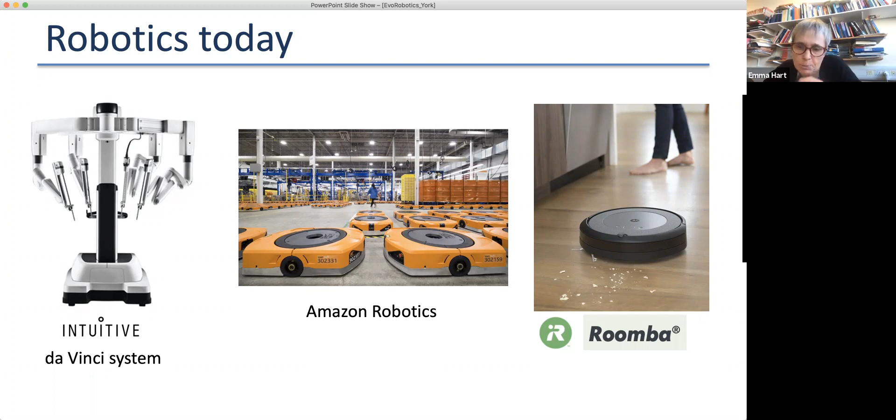But what if we want to evolve, what if we want to create robots that work in environments we know nothing about? What if we want to send a robot to a faraway planet to do some exploration, or even closer to home, put it inside a nuclear reactor to clean up a place a human can't go? We're not entirely sure what task the robot might need to do when it gets there, or what the environment is like physically. So how can we, as humans, design a robot that's going to be right for these completely unknown environments?

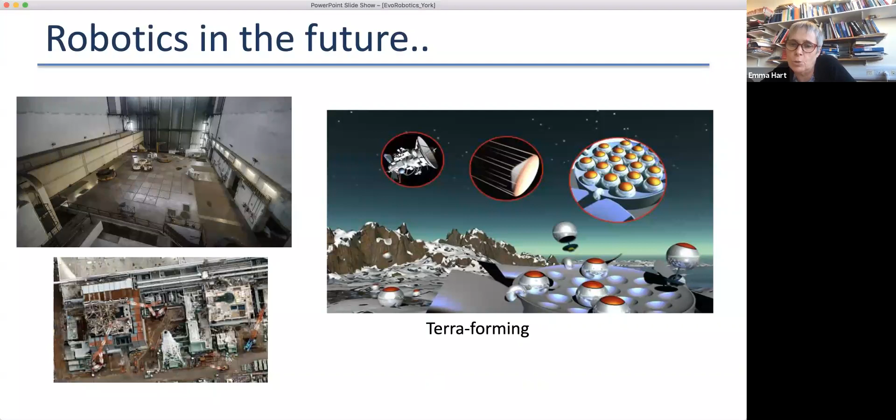This is really what I want to talk about: the autonomous design of a robot in cases where we can't use our human knowledge to do it the way we normally would here on Earth. So what I'm going to talk about is using evolution to do it. Why evolution? I know this might be familiar to some people in the audience.

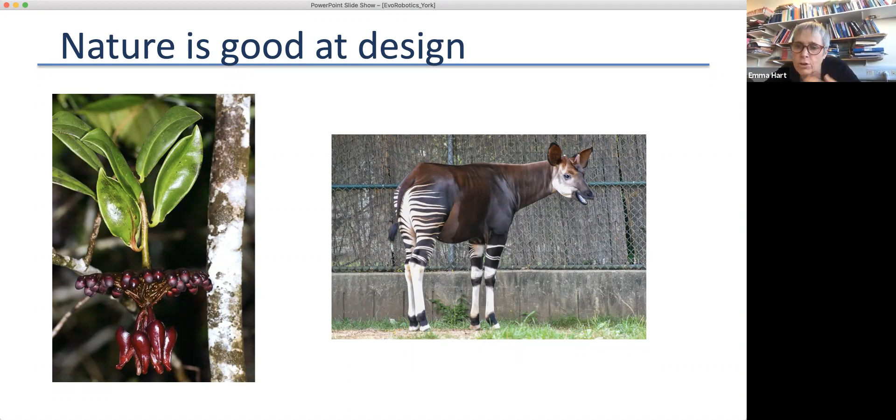So the question is then, can we somehow encapsulate this inside a machine to use an artificial evolutionary mechanism to design robots that are very good for some environment that we know nothing about?

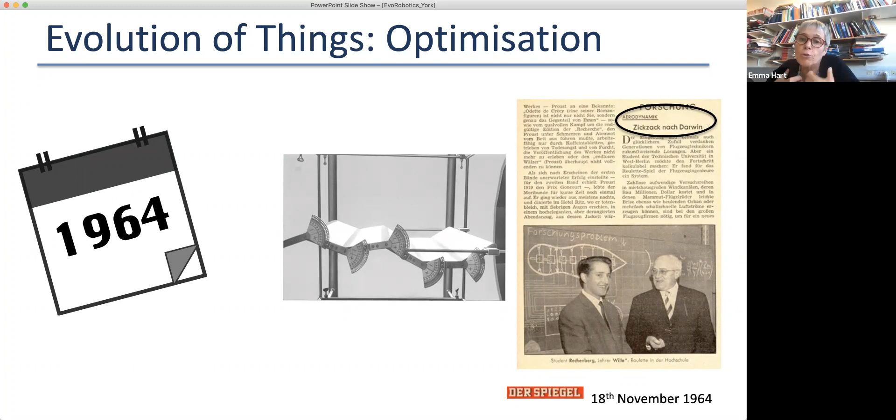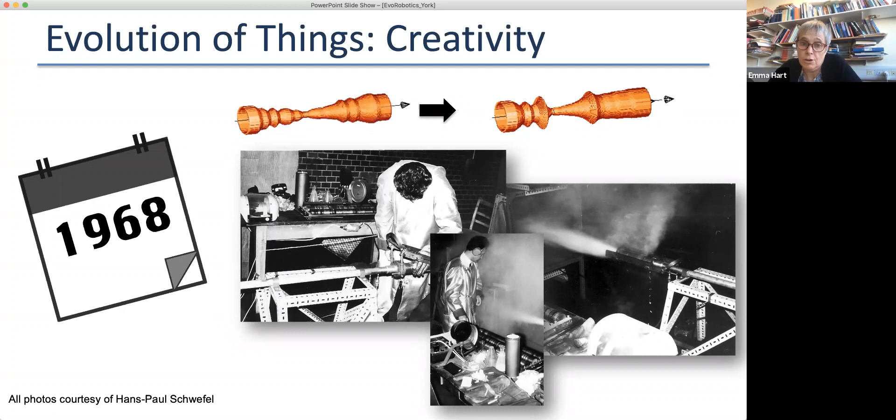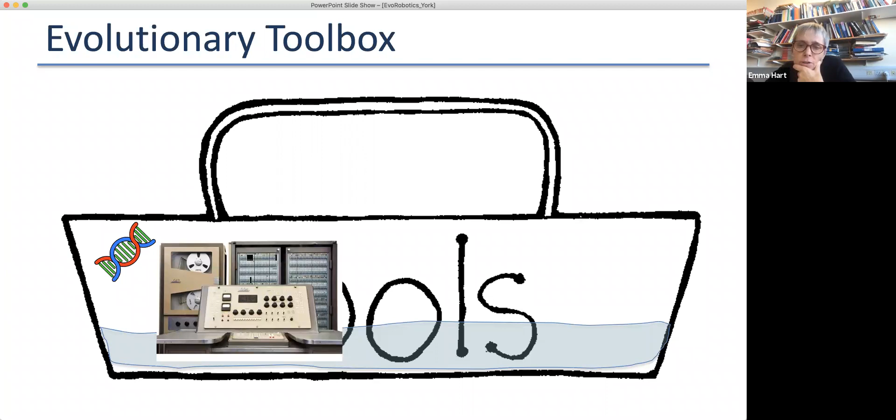Of course, we've got much more tools at our disposal now, which makes evolution a lot easier for us. Right at the beginning, this toolbox that allows us to create artificial evolutionary mechanisms was pretty empty. We had some pretty basic computers. Right at the beginning of artificial evolutionary algorithms, there was some theory that basically suggested that if you represented things as bit strings, it gave you some indication of the likelihood of evolving a good solution. Now, these are pretty basic tools if you want to start using evolution to design robots.

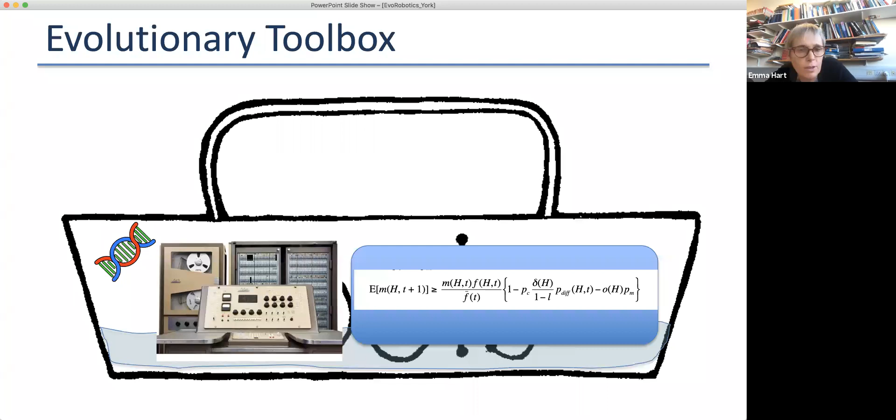Fortunately, here we are in 2021 in a much better place, where our knowledge of artificial evolution and the tools that help us do that have really vastly increased. We have much more powerful computers with powerful CPU and GPU. We have excellent simulators that take advantage of this improvement in hardware to give us very realistic simulations, close to real time, of a lot of things. We also have big advances in evolutionary theory, particularly encodings that don't rely on bit strings but allow us to use mechanisms, which I'll explain later, that let us generate designs. This turns out to be really useful for robotics in particular.

Artificial evolution also has some new things at its disposal, like a bunch of different materials. So if we want to use it to evolve robots, we don't just have to make them out of plastic - we can make them out of flexible soft materials that you can pass current through, that can flex and change their stiffness. You can even make them out of wood or paper. So the set of materials available to build robots has changed.

We also have huge advances in engineering that enable us to prototype robots very fast in the real world using 3D printing. Again, 3D printing is not just restricted to printing plastics, it can produce all kinds of things these days. And of course, advances in automation allow us to actually assemble robots from 3D printed parts and any additional things we need. So given all these tools at our disposal, it's now becoming much more clear that it seems like a realistic thing that we can try to harness all these things together and use it to evolve robots in these situations that we don't know anything about.

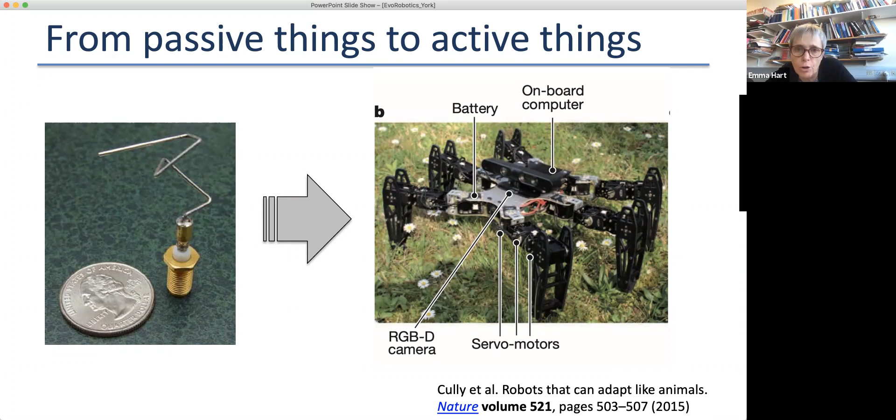So what we really have to think about now is how are we going to co-evolve or jointly evolve both the morphology, the shape of the robot, and what defines its shape in terms of how it's actuated, whether it has legs or wheels or a mixture of the two, but also its brain and how its brain interacts with what the robot is sensing about the world, and how that information is turned into signals sent to the moving parts of the robot. This becomes much more tricky.

There's a very nice book that discusses this by Pfeifer and Bongard from 2006, called How the Body Shapes the Way We Think. What they discuss is that we often just think about intelligence as something the brain has, but actually they argue intelligence can be distributed across both the body and the brain. If you have smart evolution, by evolving a smart body, you can remove some of the need for complexity in a very complex brain.

So there's this balance for the evolutionary process of figuring out how much effort goes into designing a good morphology and how much is required to design a good brain. If you get that balance right, it becomes easier to do both. You can have a less complex brain by having a very well-designed body. But to do that, you've got to do both things together. You can't just design a body and then apply evolution to design the best brain for it. You have to do both together to let evolution decide where the balance lies between intelligence in the body and intelligence in the brain and control mechanism.

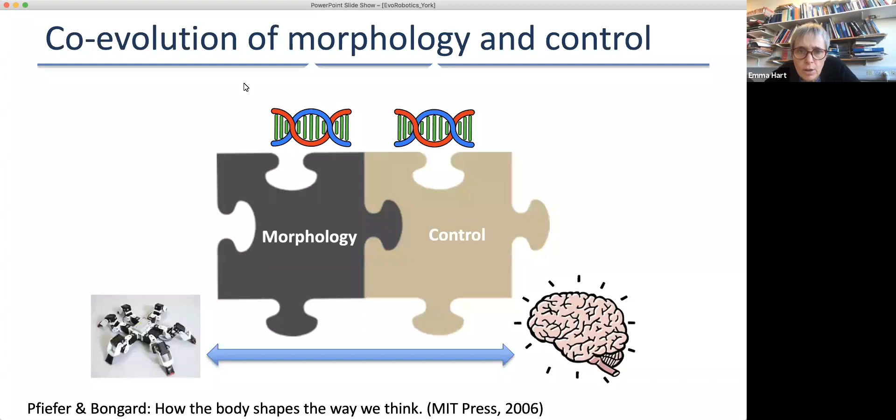So before getting onto the project, I thought I'd give you a little bit of history of where artificial evolution is at in terms of co-evolution of body and brain, because it's not a new thing. In fact, it probably goes back to about 2000, where we see one of the first examples of researchers trying to co-evolve robots in terms of body and brain.

So what you see here, if I can make these little videos work, is they evolve in simulation these very simple robots made from tubes that can join together and be actuated at a joint. They use evolution in simulation, shown in the top picture, to evolve a robot good for a particular task. After it's been evolved, they pick the best one and create it by hand. Here you can see the real physical robot, which is a pretty good replication of the simulated robot, proving it works in practice.

It does co-evolve the body and the control mechanism, but this robot doesn't have any sensors, so it's unable to know what's going on in its environment. It can only actuate and move through its environment.

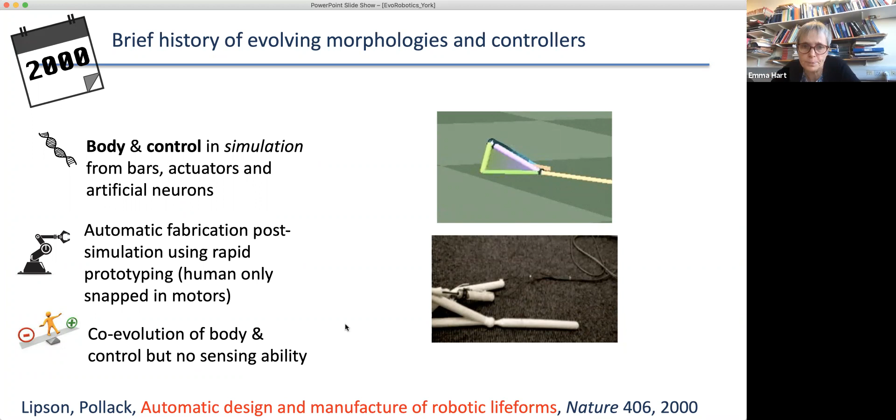So jumping forward a bit, I said earlier that artificial evolution has had a bit of a kickstart from advances in new materials. This is some researchers, again from Lipson's lab, trying to take advantage of flexible materials that you can actuate by changing their stiffness. They use an evolutionary algorithm to evolve these robots in simulation, and you can see this working here. You pass some current through, and it makes the material flex, allowing the evolutionary process to find a way for the robot to move.

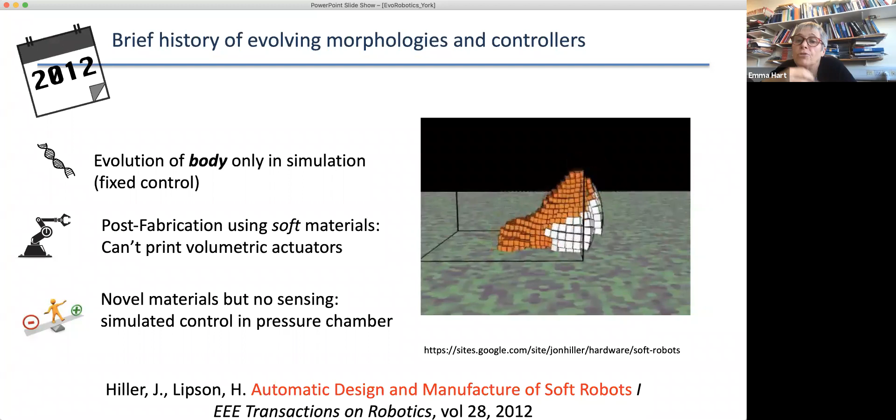Just like I showed you before, they do this in simulation, and afterwards they build the robot by hand, because at the time it was hard to actually create these actuated flexing materials. They used a proxy by putting it in a pressure chamber, and changing the pressure allows the materials to contract and expand. But again, there's no sensing here. The robot is capable of actuation, which is a step forward, but it can't sense any information from its surroundings.

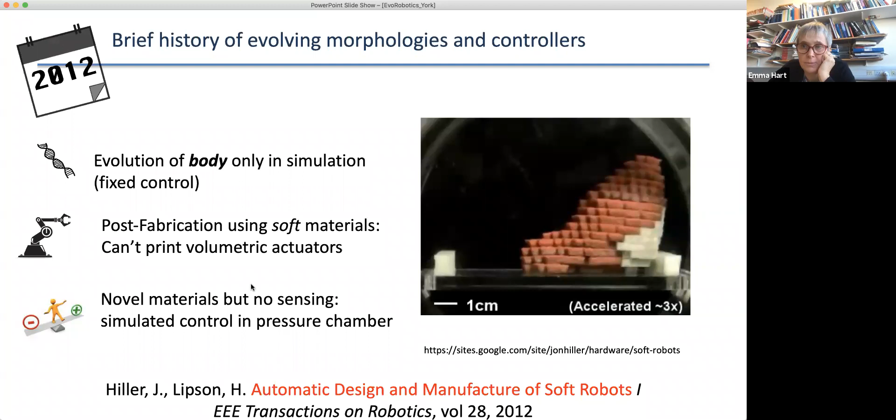One thing in common with everything I've just shown you is that in all these cases, you apply artificial evolution to evolve a robot in simulation, and then once you've found the best thing, you build the robot by hand and test it to see how it works.

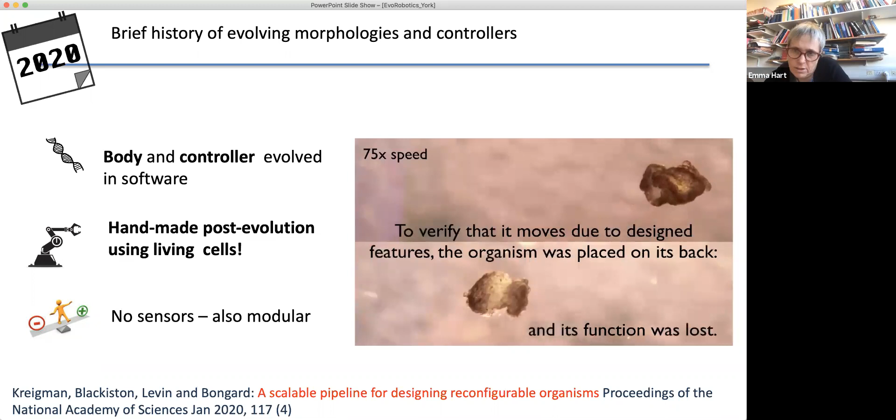This is very interesting work — obviously this is at a kind of nano scale, and they suggest it has applications in nanorobotics in future, for example in drug delivery inside the body. They do a bunch of tests to show that, quite surprisingly, these hand-built living things exhibit pretty much the same behaviors as what you see in simulation, and they do it for lots of configurations, building them afterwards.

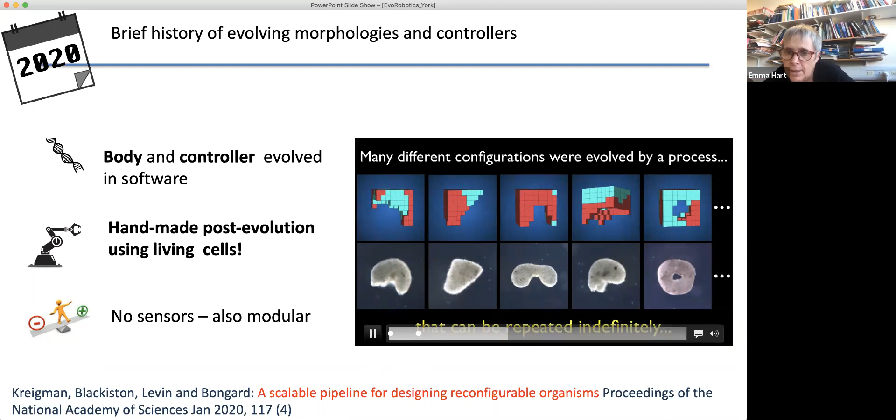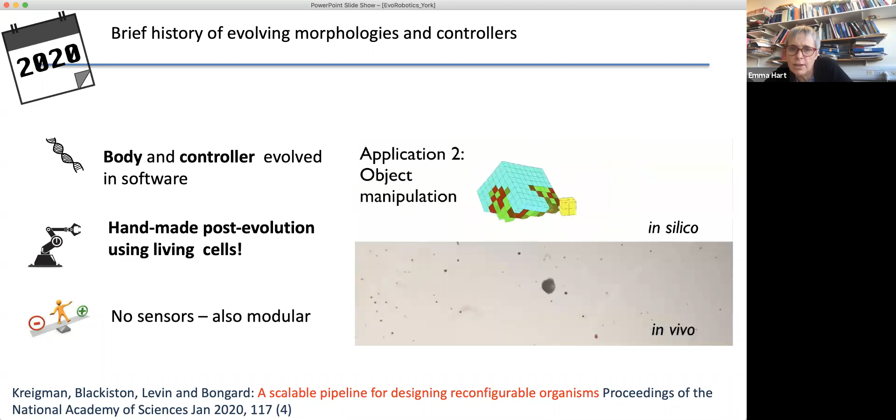So it's very interesting work. You can find it in lots of the national newspapers and on YouTube. Just to show you an example there. So here's one that's evolved to actually kind of scoop up material. You can see the simulation. Here's one for pushing, and you can see that the simulation and the in vivo ones work pretty similarly. Okay, I'm going to just stop that there.

So again, hand built following evolution, but using living cells, which is definitely interesting. But again, no sensors, and modular in the sense that all of the components used to build the robot are identical. So even though I just said that, actually surprisingly in the living cells case, the robots had pretty good performance when they were built compared to what you saw in simulation.

What we generally see, and anybody that's been working in robotics of any kind will know this, is that generally when you build a robot in simulation and then transfer it to the real environment, it very rarely behaves in exactly the same way that you expected in simulation. You can do a lot of things here, like adding noise to the simulation, doing some evaluations in the physical system. But it's a very well-known problem in robotics, and one that's really hard to get around unless we have simulators that are absolutely 100% perfect replication of the real world.

So this really leads me on to what this project is about: can we change this by saying, instead of trying to address the issue of how do we make our simulations better so that things that evolved in simulation work well in the real world, can we just do evolution directly in the real world? Because then we're going to remove this reality gap altogether.

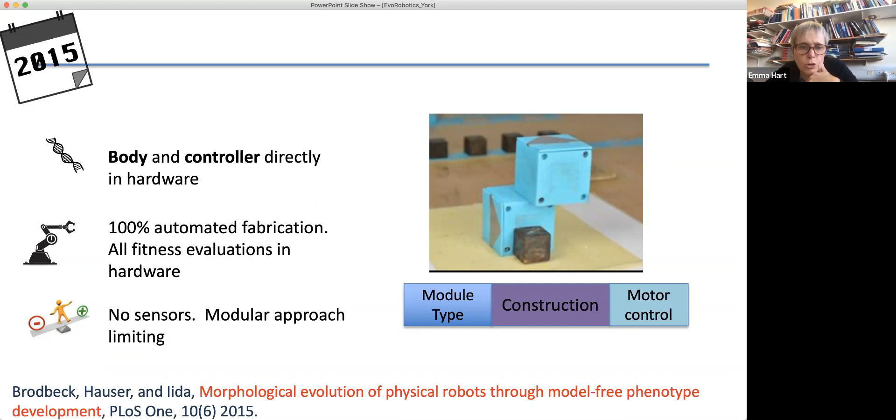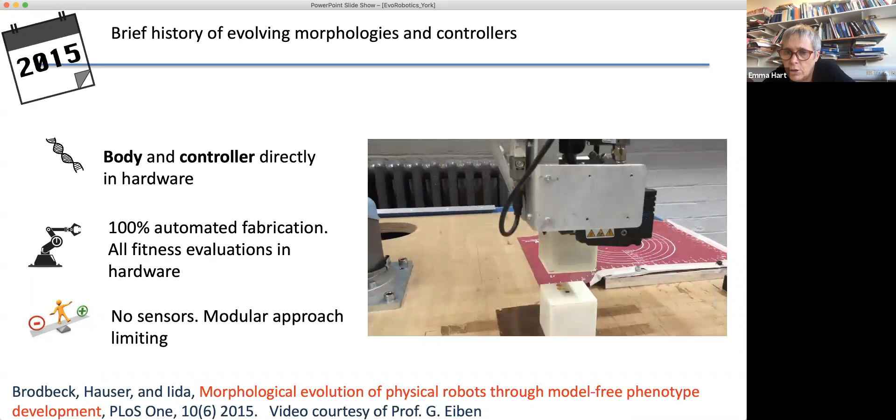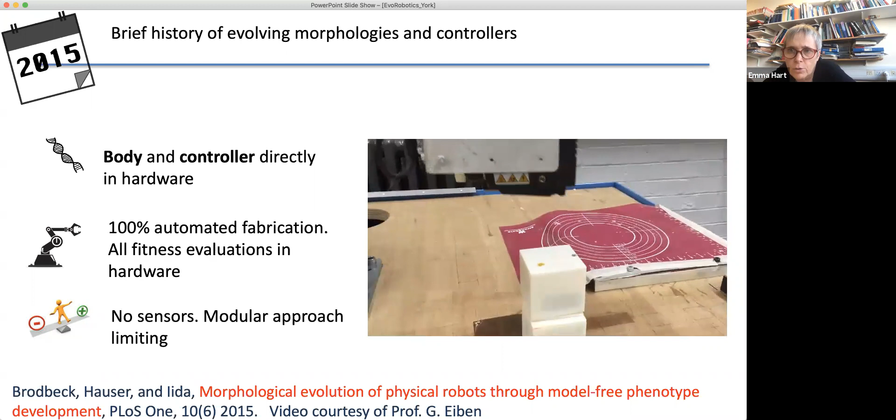So let me show you a video of this working. What you see here is basically there's a computer that's doing the evolution. It comes up with a design, and then this arm builds the robot. It's a little bit hard to see on the video, but it squirts out some glue, you'll see there. And then the blocks are glued together in the pattern defined by the genome. It picks up some of these actuated blocks and does the same kind of thing of gluing those together.

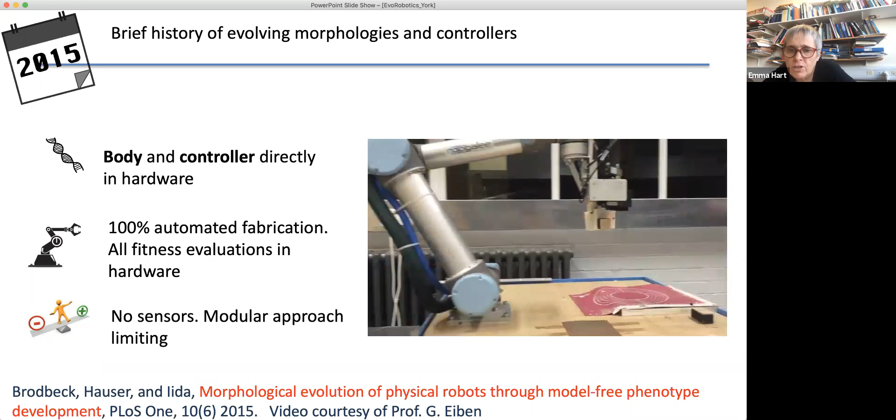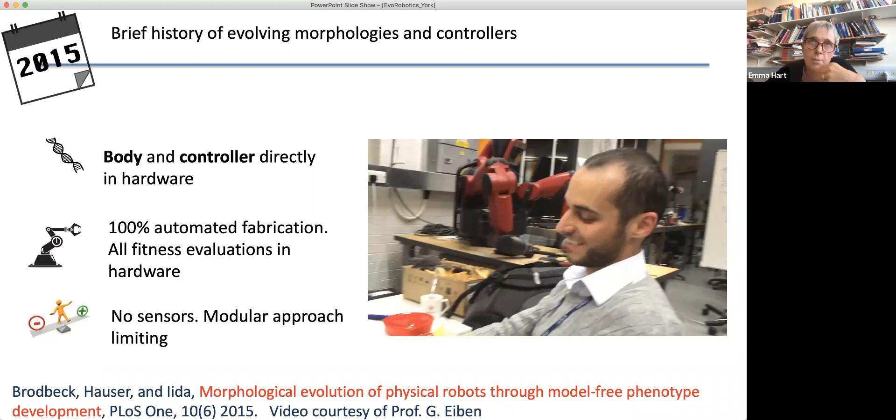And then when the robot has been built, it's picked up and moved into an arena for testing. They use what they call a mother robot, essentially a camera that observes the behavior of the robot, assigns—so you see it fell off the table there—assigns it a fitness score, feeds that behavior score back to the evolutionary algorithm, and it designs a new generation of robots. So there is no human in the loop here. The evolution is done 100% in the physical system. But again, it's limiting in the fact that there's no sensing, and by the modular design of these robots.

So that brings me now directly to ARE, the project that I want to spend the rest of the time talking about. Like I said, the idea here is really to try and evolve robots in real time and real space, something that looks like this kind of cartoon version of what we're hoping to achieve, where you have some sort of fabrication system that designs and builds robots.

Once a robot is built, it's transferred to some kind of training facility. You can think of it a bit like a kindergarten or a nursery, where the robot refines its motor skills. It's a little bit like a child waving its arms around and tuning its motor skills so it can walk and run and jump. So robots are put through a sort of training period in this facility, and then they're let out into the real world where they conduct some task. Their fitness is fed back into the evolutionary algorithm, and that drives a kind of reproductive cycle of new robots. Ideally, we would have some kind of recycling feature so we can take apart old robots and recycle their parts into new robots.

So this is the overall vision, where you could, in the far future, imagine putting this on a box, sending it all to a planet, and letting this system evolve the right robot for that planet, for that environment that we don't know anything about. So this is the grand vision.

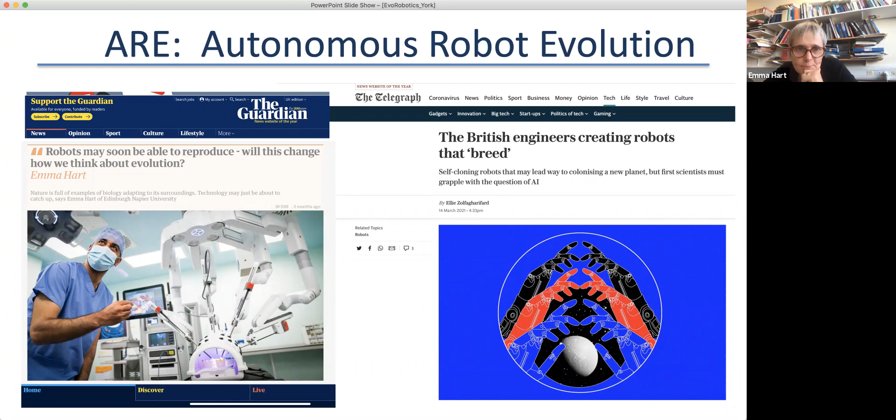So just to go through this in a little bit more detail, we're creating this thing we call the evosphere, where we have this evolutionary cycle. The first step is artificial evolution creating a genome that defines both the body and the brain of a new robot. That blueprint is sent to our fabrication system, which actually produces this new physical robot. This physical robot is then sent to a test facility where it undergoes some period of training to refine its motor control. It probably undergoes some kind of test — if it turns out it can't move at all, there's not much point wasting time progressing with that robot, so we can just discard it.

If it passes that test, then it's added to this pool of robots already out there in the world we're trying to evolve in, where it gets to execute a task, and its performance on that task is used to drive a reproductive cycle about what robots get reproduced in the future. So this is the grand picture — I'm just going to talk about some of the steps in a little bit more detail.

So those of you at York might have seen this hidden away in one of the electrical engineering labs — this is one of the first versions of our robot factory. What you see here is a 3D printer on the right, which is printing out the skeleton, the body of the robot, according to a design produced by the evolution. What you see on the left is a kind of store of components, like a warehouse that has things like wheels, joints, sensors. The idea is that the blueprint can indicate which of these are to be used, and then these can be used in the assembly process to build the final robot.

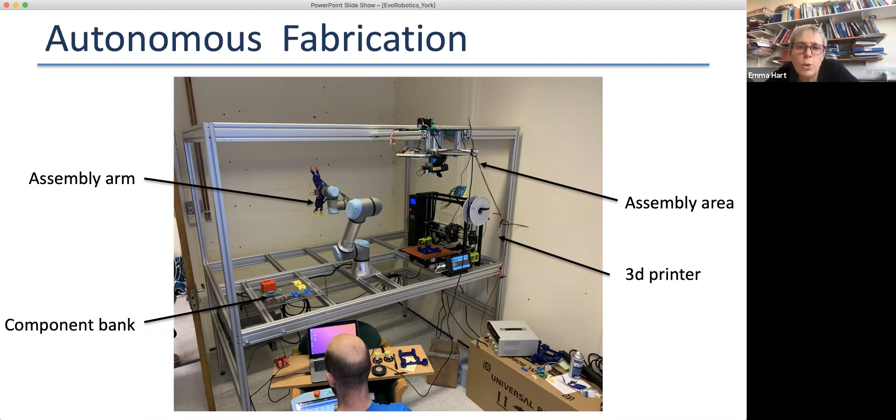And then, of course, what you have in the middle is this assembly arm. Once the skeleton has been printed, this assembly arm will attach the components that are needed to the skeleton, including the brain of the robot, and download the software into the brain of that robot. I'll show you a video of it working shortly, but just to talk about some of the other components.

What's controlling all of this is what we call an ecosystem manager. I've talked a lot about how it's really important to do this inside a physical system, because that's how we solve the reality gap. But it also makes sense that if we can simulate, we might as well do some simulation in parallel, because simulation is much faster. And even if the simulation isn't 100% authentic, it might help inform what's going on in the physical world. So what we're creating is essentially two parallel worlds: a physical world where everything happens directly in real robots, and a twin of that world where things are evolving in simulation, much faster but possibly not as authentically.

What this does is raise some interesting possibilities for evolution — what we can do is take something that evolved purely in the virtual world and send it to the real world, where it can be built and hopefully tuned to work better in the real world. So that tries to address the reality gap.

We can do it the other way around though. We can take things that are good in the physical world and send them to the simulator. Hopefully this improves what's happening in the simulator, because we're sending robots we know are good in the physical world to the simulator, and hopefully they will pass on some of their characteristics to these virtual robots.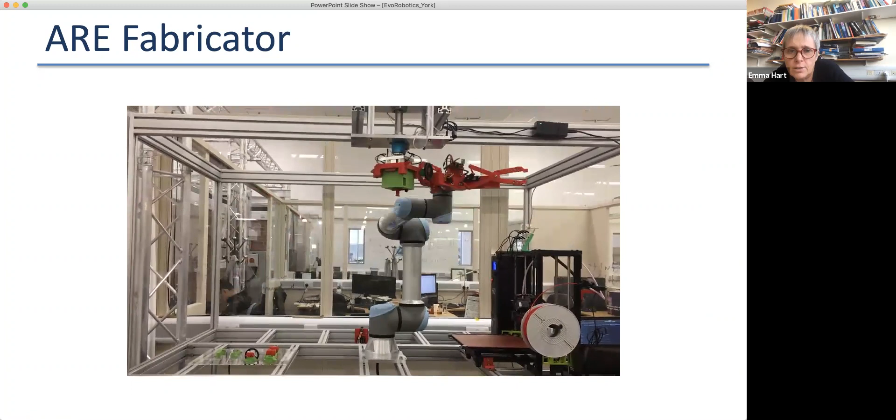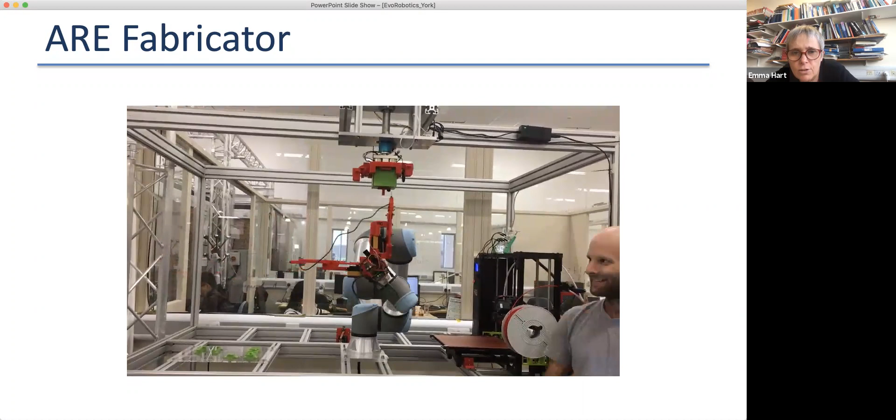I'll just skip forward a bit to show you - this is actually one of the earlier iterations, so you can see the problem with cabling: when you start trying to plug these cables in, you can see immediately how they all start to dangle down and get in the way of each other.

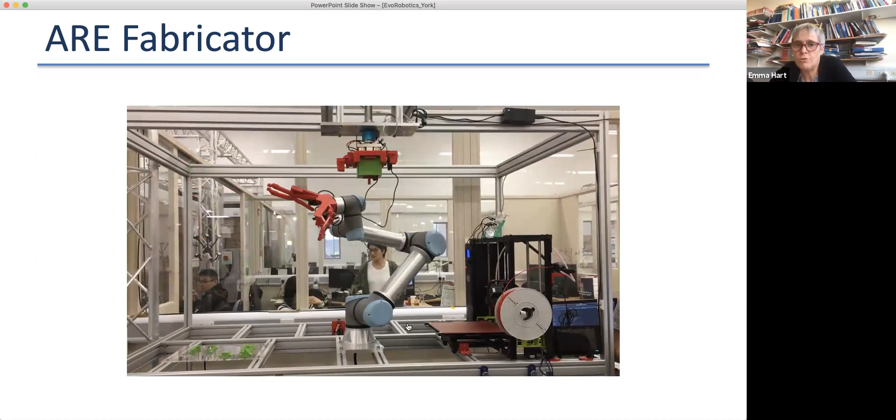So this has now been solved by using these retracting cables. Not trivial to get to this stage by any means.

So let me talk briefly about the algorithm design parts as well.

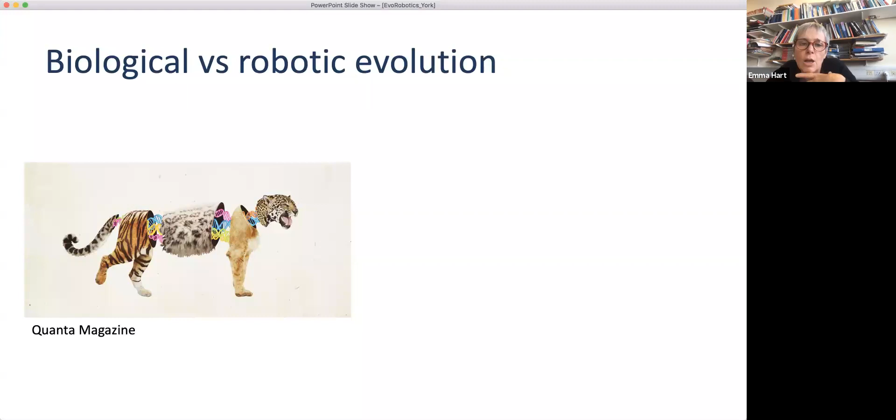One thing that makes this kind of evolution different from biological evolution: if we look at biological evolution, there's some evidence that within a genus, for example within big cats, you get interbreeding. Lions and jaguars interbred at some point in the past. So you do see this kind of breeding within similar species. But what we never see in real evolution is breeding between things actuated by completely different means, producing something like this thing I found on the internet, the snowy owlpard, obviously a mixture of a snow leopard and an owl. We just don't see this happening in real evolution.

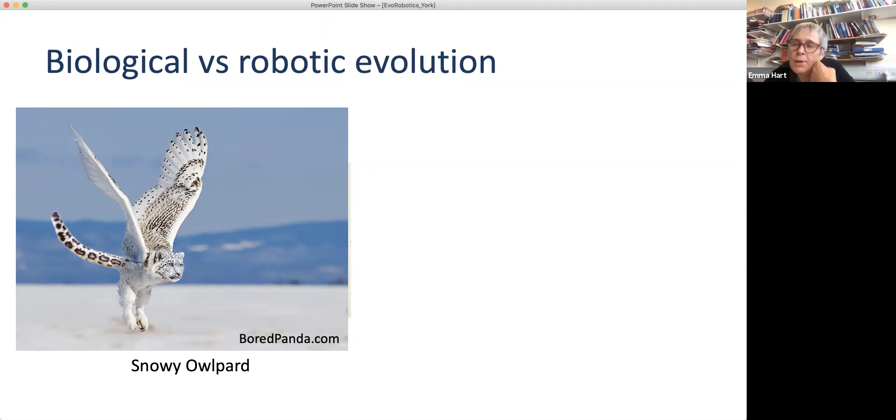But in robot evolution, this is exactly what we want to see happening, because we want to, for example, take a robot that walks on legs and one that works on wheels and create a hybrid of the two, maybe with 2 legs and 2 wheels, because that might allow it to work in multiple different situations. So we really want to be able to do this interspecies breeding.

The hardest thing about it is not creating something with a hybrid of the physical characteristics, but dealing with the brain part, because the brains that allow these 2 different robots to move are very different. The kind of brain that takes in information and controls legs is very different than the brain that controls 2 wheels. So if we want to hybridize 2 very different robots, while their physical structure might turn out okay, it's really difficult to inherit a brain that works in this new robot, because the 2 brains are just so different. This is one of the big challenges we've had to address.

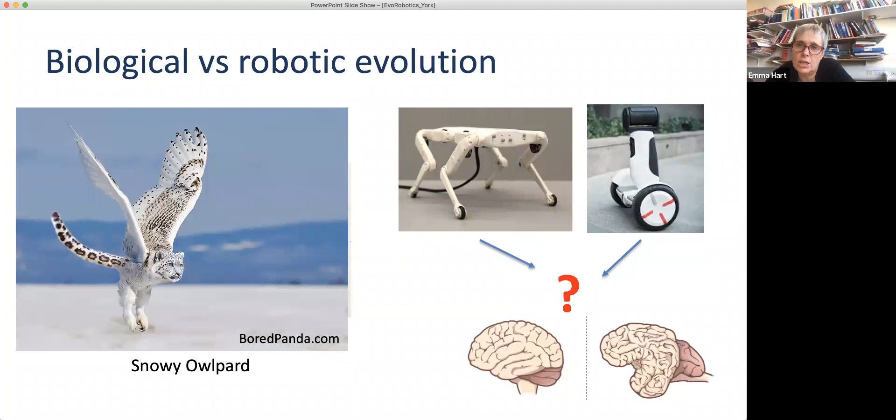I want to briefly talk about a complicated diagram showing some of the ways we've been doing this, using a mixture of evolution and learning. The first way is a mechanism that focuses only on evolution to jointly optimize the body and the brain, to get around the problem that if you take 2 very different things and create a child robot from them, it's very unlikely the brain will work at all.

To get around this, instead of trying to directly inherit brains and merge them together, we use an indirect mechanism, which instead of specifying what the robot looks like, specifies a mechanism by which you generate the robot. It also specifies a mechanism by which you generate a brain. So what's evolving is the generating mechanism, not directly the shape or the brain.

We use something called a CPPN, which stands for a compositional pattern producing network. I'll show you an example in a second. And in fact, we use 2 CPPNs.

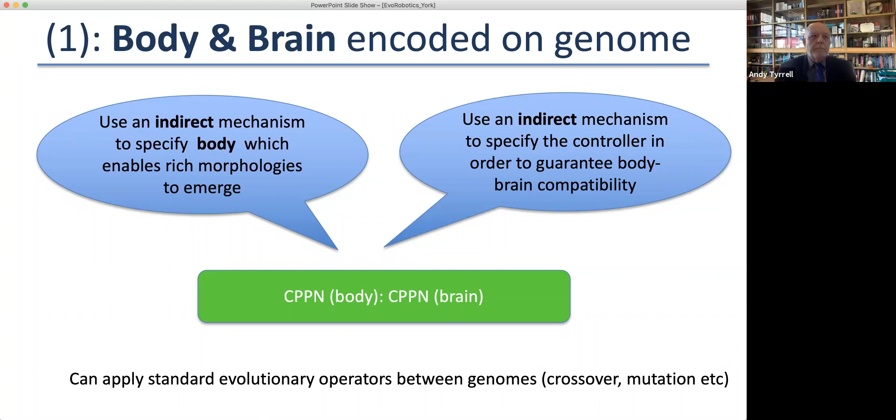I think we lost her. For the minute, yeah, looks like it. She might come back very soon. Yeah, I think so. Yeah, cool. Okay, so I don't know where I was.

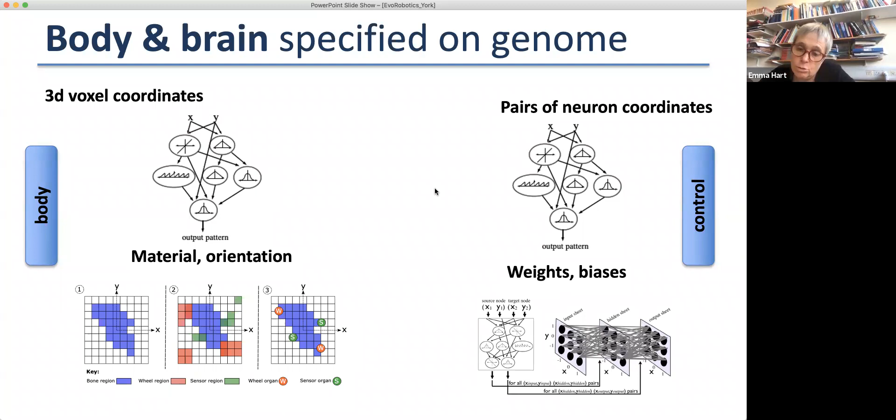We use exactly the same type of network to create the neural network. Once we know the shape of the robot, we can create a network. What the CPPN does here is, instead of passing in coordinates, we pass in pairs of coordinates of neurons, and it outputs the weights and biases for each pair of neurons. So what we're evolving is these two networks on the top row, which are mechanisms to generate robots that allow us to address the brain-body mismatch problem.

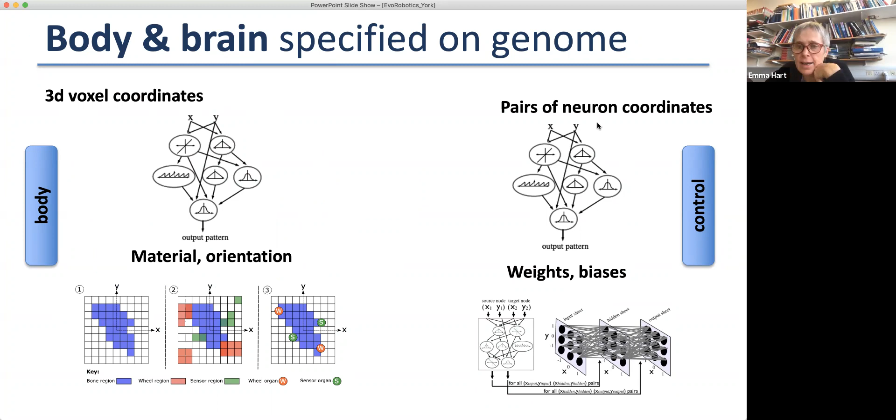So an additional thing we can do is, what I showed you on the previous slide allows us to generate a neural network that controls the brain of the robot. But we can actually try to improve that generated network during this kind of learning process in the kindergarten nursery I talked about before. We can take the weights and apply an additional learning algorithm to try to improve them, fine-tuning the network specifically to the body of the newborn robot. So learning definitely adds some knowledge and improvements there.

Another thing we can do is try to simplify the process. Instead of co-evolving the body and the brain, we let the evolutionary part evolve the body. Once we've produced a body, so we know how many sensors and actuators it's got, we just generate a neural network controller to match that with the right topology. Then we use a learning algorithm to learn the weights for that generated controller that exactly matches the topology. This puts some of the emphasis onto the learning mechanism rather than the evolutionary mechanism, and in some cases we can write this learned controller back to the genetic material.

A way to improve this is, every time we come across a species of robot - for example one with one wheel and two legs, or another species with one wheel and one leg - every time we come across a new robot of a certain species, we can keep the controller we learned from it. If we come across a new robot of the same species, we can start learning from the previously learned controller. This allows us to bootstrap the learning process by keeping a collection of controllers in an archive that maps to species of robot, and we use that to bootstrap the learning.

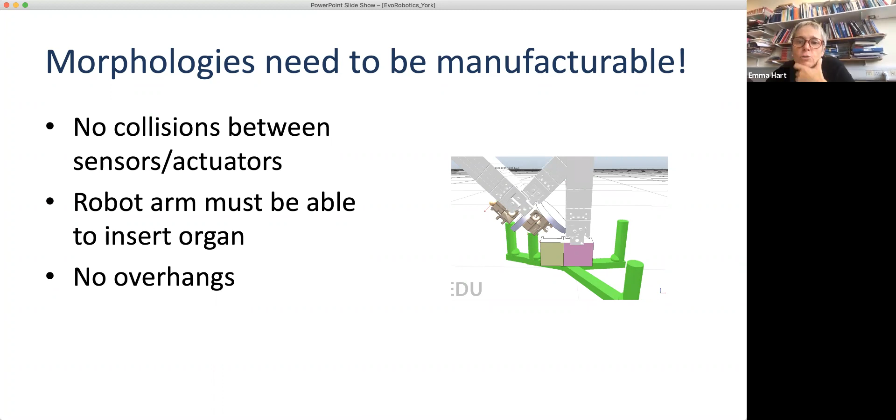Another thing is in the design of the skeleton - it seems pretty obvious that you can't print overhanging material on a 3D printer because it would just drip down. So you need to take that into account, constraining the evolutionary process to only produce skeletons that can be made by a 3D printer. We have to add all of these additional things to make our system work that are new in the context of evolutionary computing. None of these things matter in simulation, but they make a real difference for us.

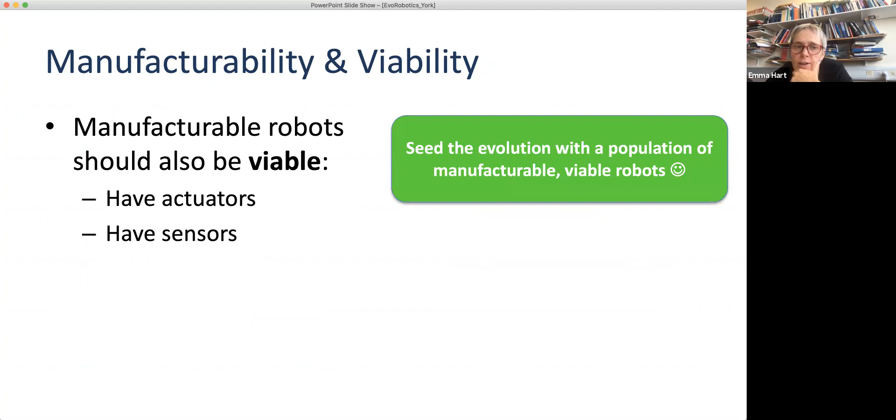Also, we want these robots to be viable - there's no point in evolution coming up with something that doesn't have any way of moving or no real mechanism for sensing the world. So what we do to try to influence this is, rather than starting off with a random population like most evolutionary algorithms, we try to seed the population with a set of robots that are manufacturable. But also, because evolution relies on having a diverse population, it's really the diversity that makes evolution work.

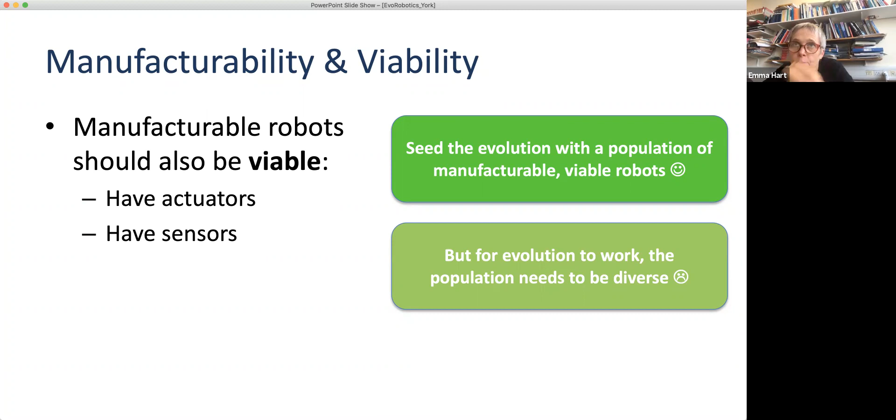We also need to make sure that the seeded population is also diverse enough. So we do this with a thing called Novelty Search, mainly led by Edgar at York. It's a form of evolution, but rather than selecting based on performance and using that to influence survival of the fittest, you select based on novelty.

I briefly wanted to touch on ethics before I finish up. I mentioned those newspaper articles, but they also generated some other articles which didn't really send the message we're trying to create in this project. I think it reflects how easy it is to misinterpret what we're trying to do, and why - of course if you're creating a system where things can design and manufacture themselves, there is a serious point that you need to think about how you ensure the system remains in control and that a human has oversight of it. So it's something that's always at the back of our minds for the project.

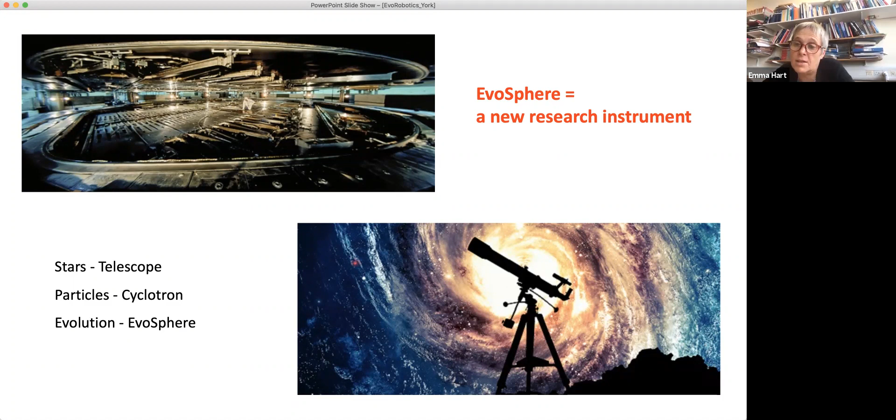Just like we have telescopes to study the stars or a cyclotron to study particle physics, maybe some reproducing, evolving robot facility like this will allow us to study things about evolution itself. The point was made a long time ago by John Maynard Smith, the famous biologist, who said we only have one system to study evolution with, and until we get interstellar flight, we aren't going to have another one. This is exactly what scientist John Long tried to do, looking at evolution of fish - he used an artificially evolving system of robotic fish to try to answer questions about real biological evolution.

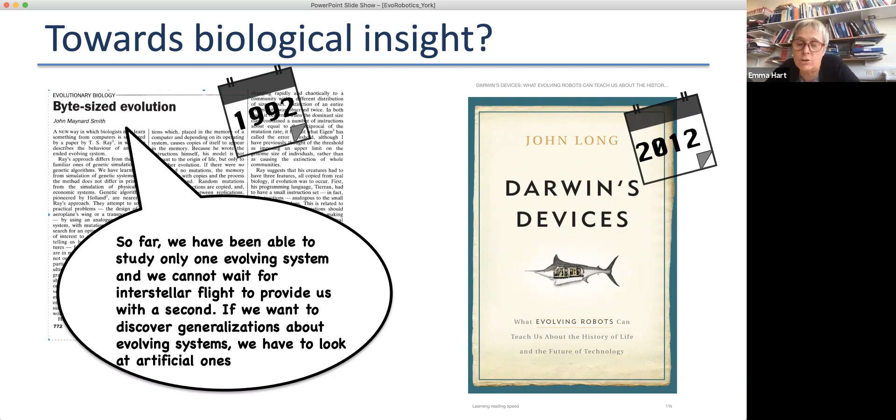I'll just leave that there. Thank you to all of these people who did all of the practical work and really made this happen. I've skimmed over a lot of the detail, and you can find all the publications associated with that on the York website associated with the project.